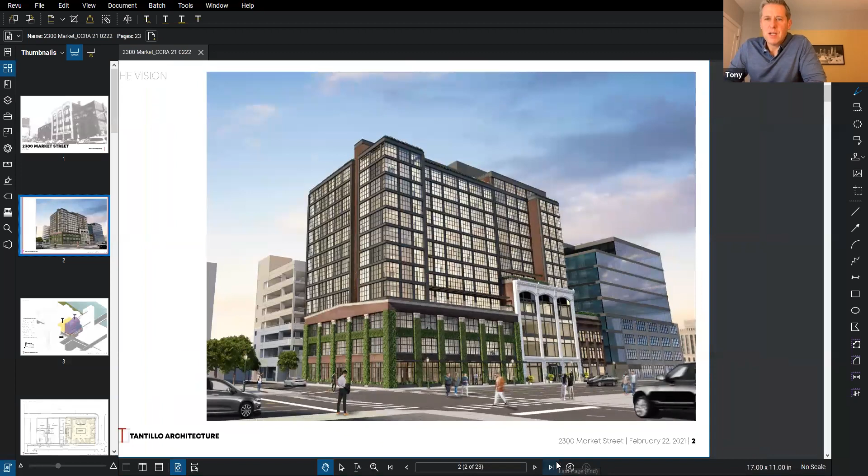Wonderful. All right, so the properties we're talking about, I think you'll be familiar with. What you're seeing here is the corner of 23rd and Market Streets. The corner at 2300 Market is what was most recently the Culinary Institute. And then there are the two buildings directly west of that, the one with the white facade, and then the next building to the west. And if you keep going a little further, you get to the new Aramark headquarters building.

Procedurally, what we're proposing to do with the zoning application is take the three existing buildings, located on three separate zoning parcels, and combine all three parcels into one zoning site, and all three buildings into a single existing 4-story building. Our proposal then calls for adding a 10-story addition on top of that existing 4-story building, for a total of 14 stories. We're preserving the historic character of the existing building and those facades, then stepping back from those facades. The new addition is modern and yet has an industrial aesthetic very consistent with the existing buildings.

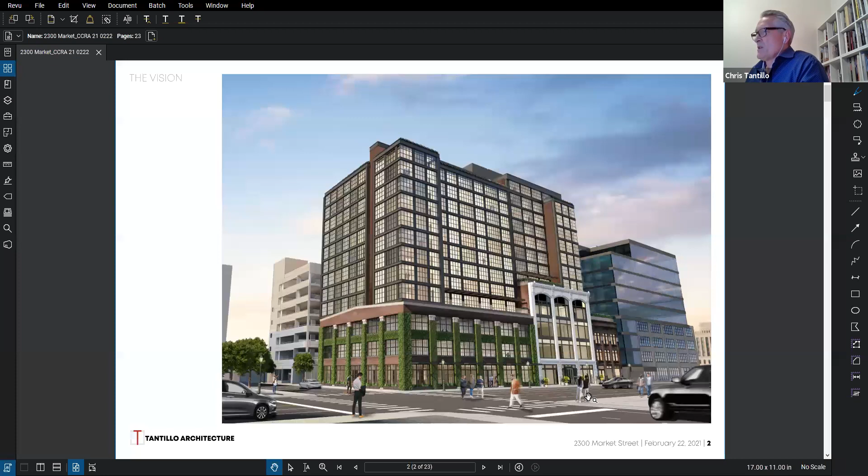As previously mentioned, the design seeks to create what I would describe as an urban loft-like quality to the overbuild. You can see that we pushed and pulled the building's facade back and forth along Market Street so that we don't end up with an overbearing continuous wall across Market Street. Billy, do you want to go to the next slide?

So this massing diagram begins to articulate exactly how the uses are deployed in the project. In red, let's talk about the retail for a moment. We placed the retail on the bookends of the project on either end, and also on the backside along Ludlow.

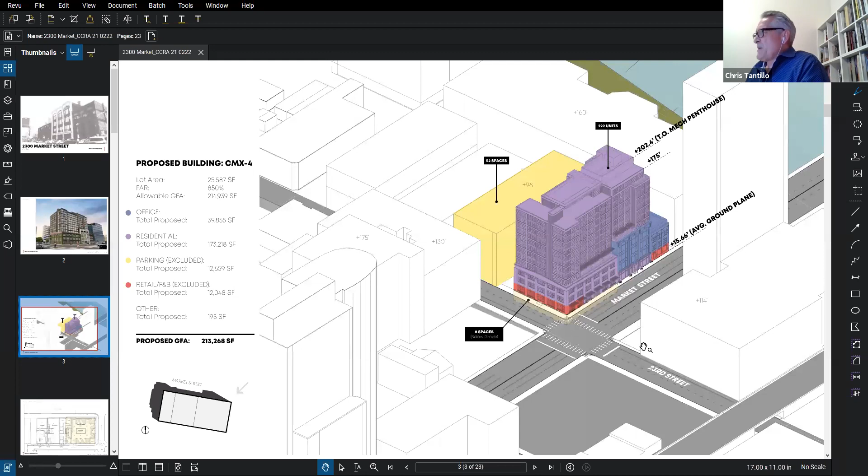on the first ground level. They really activate the corner, and the main entrance for the apartment building is in the Hobb Building at the entrance there. The office space is in blue, on the upper floors of the Hobb Building and the townhouse building. By right, we're required to have 60 parking spaces. We're fulfilling that with 8 in the lower basement level of the Culinary School, and we're also getting dedicated 52 spaces in the parking garage behind us.

This diagram shows how the massing pushes and pulls across the facade with bays at the corner, pulling the stair volume in and really trying to articulate the building as much as possible. Next image.

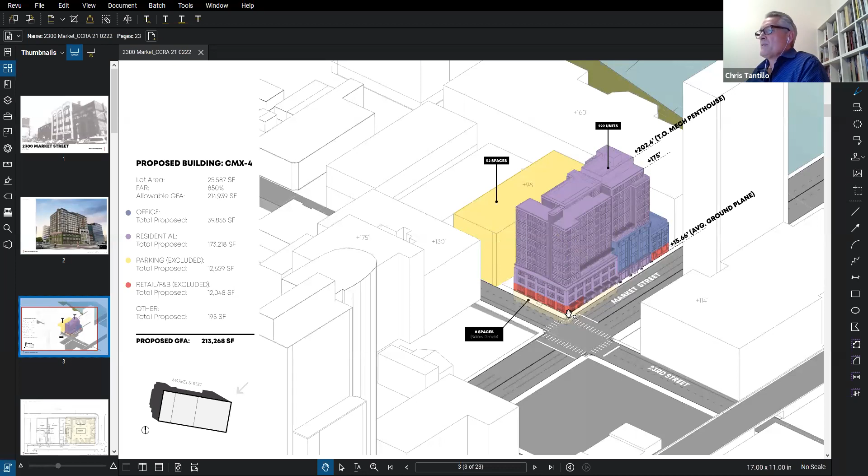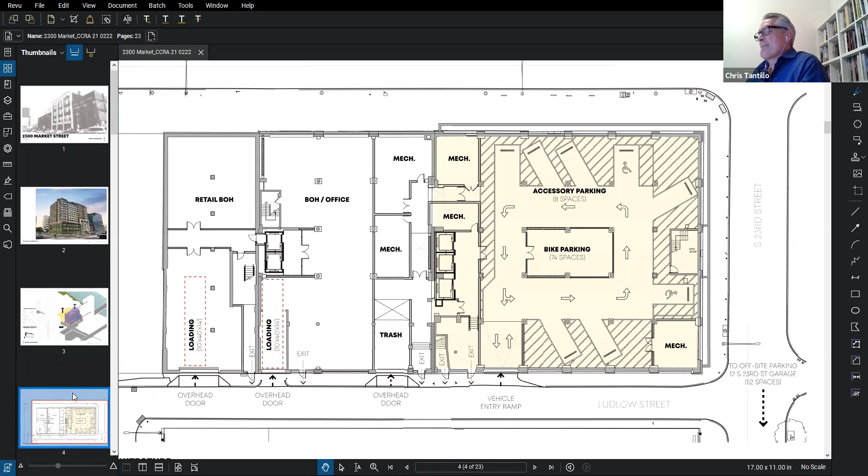You can see the new street trees. We're required to have 7 street trees, so we'll be installing street trees along Market Street. Also, as part of the design, we're proposing to have a living green wall that wraps around the 2 sides of the culinary building, which you saw in the previous rendering, and that would be with English ivy, an evergreen ivy, so it would be green year-round.

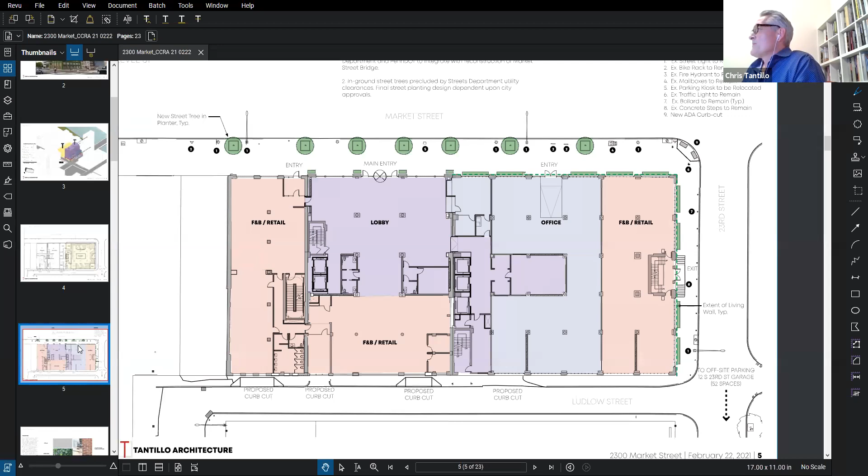The living wall, as you saw in the previous renderings, once again a snip of that. In other areas, the back of the building has existing stucco on it. And in other areas where we're adding some additional areas of new building below the overbuild but still above the existing, that will be covered with stucco as well.

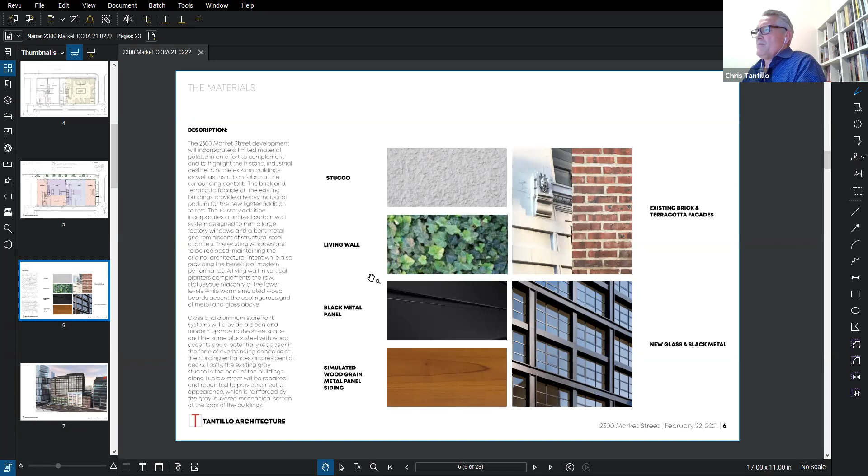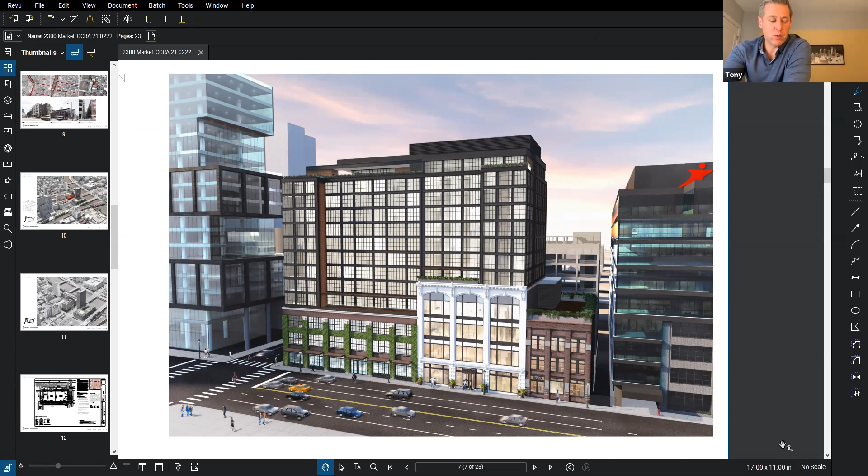Chris, did we provide this? I think we provided to CCRA our larger slide deck, which is what was provided to the Civic Design Review Committee. But we can send this along as well. Well, if you have no objection, CCRA will post on our website the deck you sent us, which was the CDR presentation, and it will be available for anybody to see. Is that okay? Yeah, that's what CDR will be publishing on their website as well, so that's fine. So we'll make that available in the next few days.

Great. Are there any commercial tenants identified? I think that would be for Jonathan. I don't believe there are, but Jonathan? There are not specific tenants identified as of yet.

We've had ongoing conversations with several well-known restaurateurs in Philadelphia. We also are having a conversation with a co-working office group that currently has off-site space in the Aramark Building, for some expansion space for them. So those are the two pieces of information I have at this point that I could give you about that.

And I guess that leads to the next question, Jonathan. When do you expect that the building will be complete, if everything goes as hoped? If everything goes as hoped, the project should be done within 24 months.

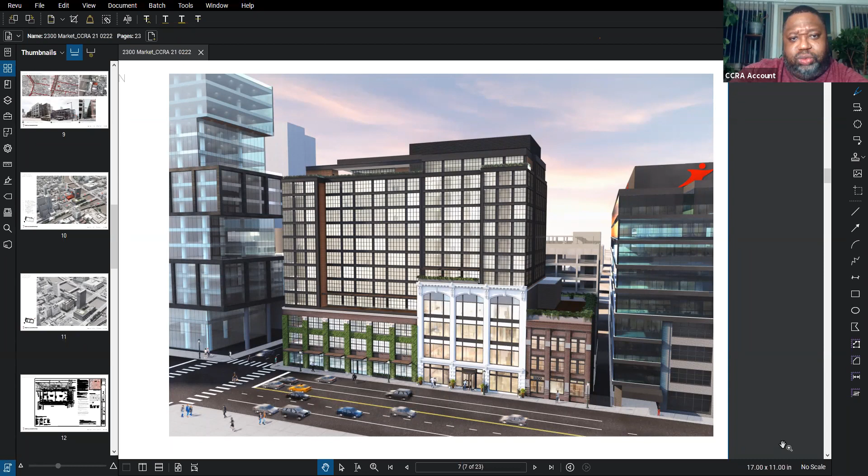I think that's fair, Chris. Yeah, that's correct. All right, Travis? All right, the next one's more of a statement. Since Ludlow runs west, I implore you to seek streets and council approval to change 2300 Ranstead Street to run east. This would alleviate trucks driving through CCRA's southern portion.

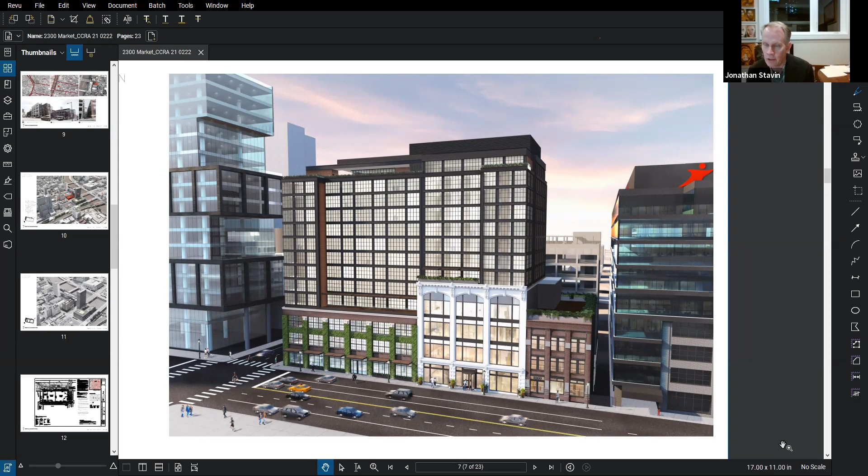So the issue with that becomes a little more complicated, and this issue has been addressed and worked at for a while because of the Aramark Building. What happens is it's not just a matter of changing the direction of Ranstead Street. We also have to deal with that one block of 24th Street. Right now, 24th Street only runs south.

There was a discussion previously about changing the direction of Ludlow Street. So if we were going to change the direction of Ludlow Street, we would have also had to change the direction of that block of 24th Street. So we have eliminated that as a possibility. Talking about Ranstead perhaps being a two-way street would obviate the need to change the direction of 24th. That's probably more doable.

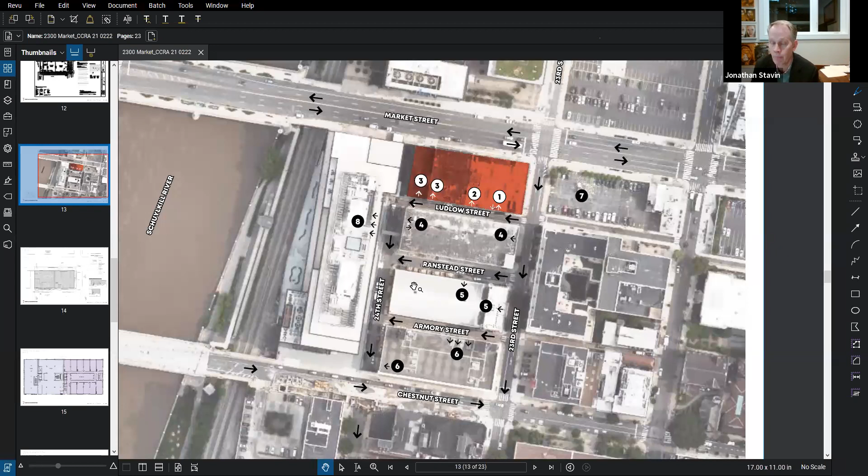It becomes, we have to look a little bit closer at, if we change directions of streets here, the turning radiuses for trucks and things like that. But we're all in agreement that it's better to have truck traffic go to 23rd Street rather than continue down 24th all the way to Locust, which I think is actually the first time you could turn east.

Jonathan, if Ranstead were two-way, why would you need to take any action on 24th? We wouldn't. A truck leaving Ludlow from the building would come down a block and then could go east on Ranstead and south on 23rd and east on Chestnut.

Correct. And that's something we're all working on, and CCRA is supportive of and would work with streets if the developer asked us to, for the reasons we talked about, which is to keep heavier traffic at the north end of the neighborhood instead of having it go to Locust and then around Rittenhouse Square, which would be more congested.

Travis, what is the mixed income bonus for?

The mixed income housing bonus is a zoning bonus that lets you have additional floor area ratio or density in the building. The zoning code gives you two options: you can either provide the required number of mixed income housing units in the project itself, or you can make a donation to the housing trust fund. There's a calculation for how much that donation is, and the housing trust fund then builds affordable housing units where they're most needed using those funds. That's the approach we'd be taking.

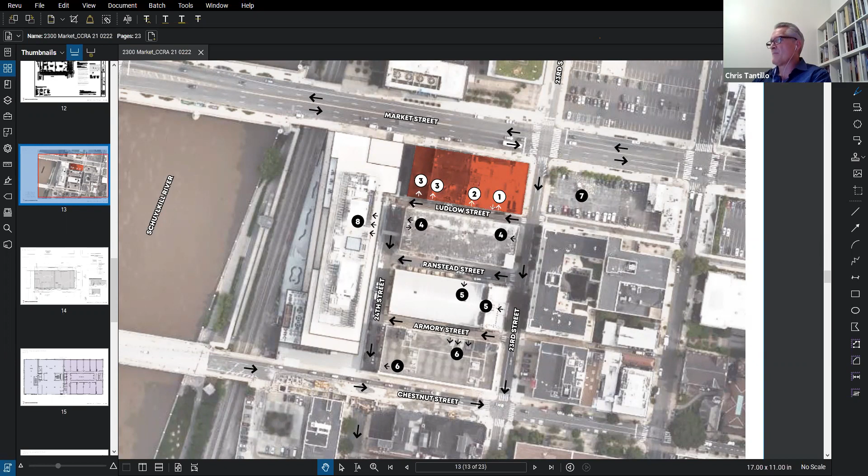There's 222 apartments. Billy probably knows the mix better than I do. There's no 3 bedrooms, just 1 and 2 bedrooms. Let me pull up the chart real quick. There's your mix - studios, 1 bedrooms, and 2 bedrooms, definitely mostly 1 bedroom.

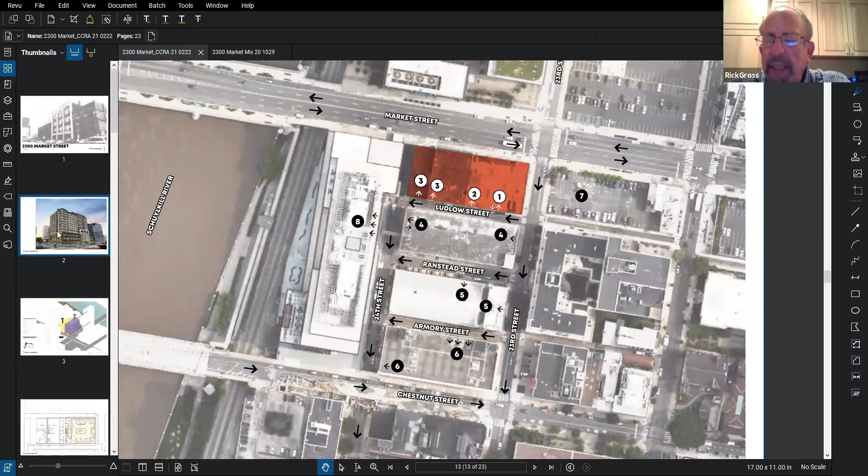I'll follow that up and ask Chris and Jonathan what the expected market is for these units - young professionals?

It's going to be a luxury product. The units are on the larger side for what's being built now in the city, most of them. The thought is it could be a work-from-home type environment, and would lend nicely to some of the offsite amenities being in the building, where if people wanted to get out of their apartment and go down to a desk at offsite, they could do that. But it's going to be your typical center city resident mix, not geared towards students. I wouldn't call it an entry level building. That's about it.

Will the Market Street pavement be replaced? I think the question is probably about the sidewalk rather than the street pavement. Market Street is being completely redone by the state, I believe PennDOT is doing Market Street.

We've been in conversations with PennDOT about the sidewalk elevations, and as reflected in Chris Tantillo's rendering, the sidewalk will be pretty much at grade. Right now the sidewalks have a very steep angle, I'd bet at least 45 degrees down to the road, so that's going to be eliminated. We're going to drop the sidewalk. Originally they were going to bring the bridge up to the sidewalk, but we were happy to have the sidewalk come down because the buildings originally were built at a much lower level. So it's all working out - that'll provide a much more normal sidewalk pedestrian experience than currently exists.

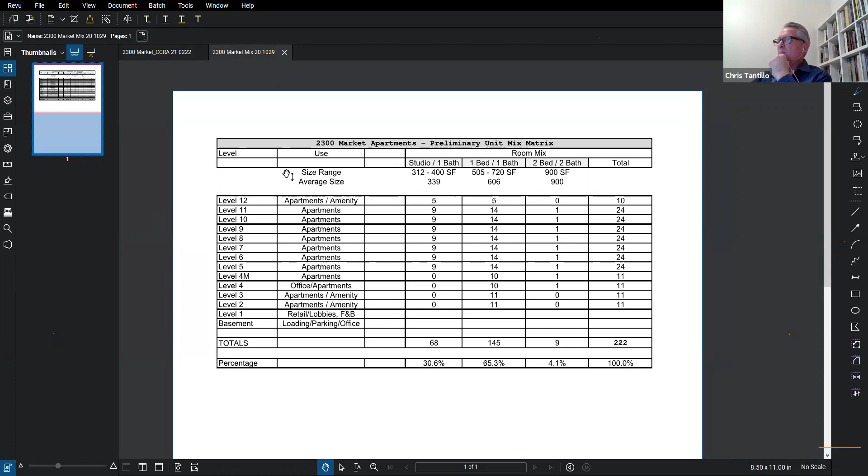What is the estimated cost of the units, in terms of rental? We haven't actually set the pricing yet for the project. If I was going to guess, I would tell you that it will start within the $3 a square foot range. So your one-bedroom units probably begin around $1,650, $1,700, and go up from there.

I have a statement and a question. You've changed the intention of the building from hotel to apartments, quote, because of COVID. What makes you think there's a demand for 222 more rental units that do not appear to be large or spacious?

Well, COVID has more to do with financing of a hotel project than it does with occupancy. It's more of a financing issue rather than an occupancy issue. Hotel occupancy in the city right now is low, so we couldn't go out and finance a hotel project right now. But you can still finance apartment projects. Our sense is that, prior to COVID, the occupancy rate of downtown apartments was in excess of 95%, even with all of the new supply that's been coming on. So our bet is that as things begin to normalize again, people will still want to live downtown in Philadelphia, and these units will be absorbed. Also, with the exception of the 2300 JFK project, there hasn't been a tremendous amount of new apartment construction in this particular neighborhood. When you consider the amount of office construction you've had, between the Morgan Lewis Tower and the Aramark Building, that's close to 1 million square feet. I'm not sure of the exact square footage of Morgan Lewis, but the Aramark Building is 600,000 square feet. So you have close to 1 million square feet of new office tenants in this neighborhood, not anywhere matched by apartment construction in that area.